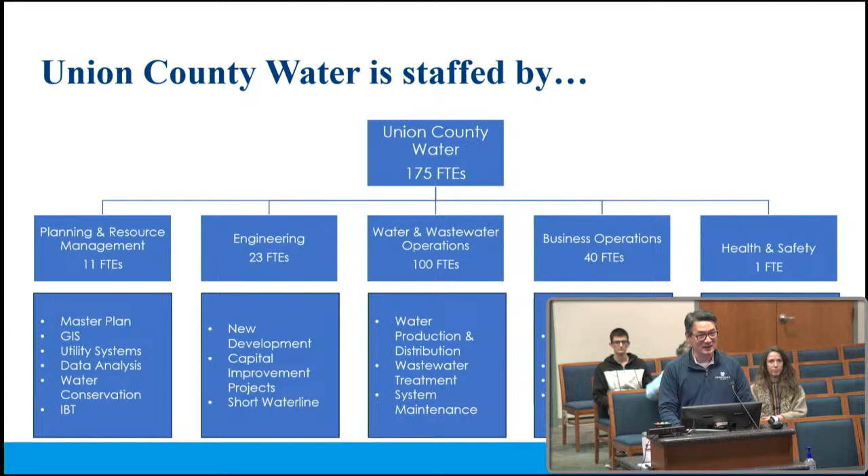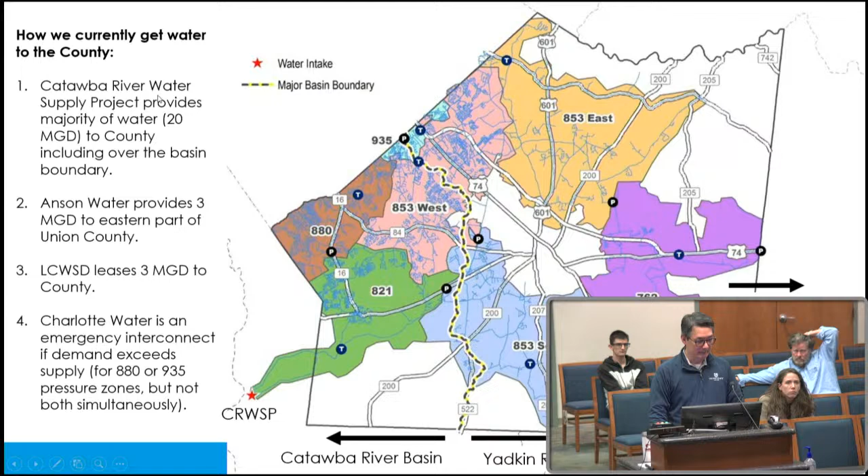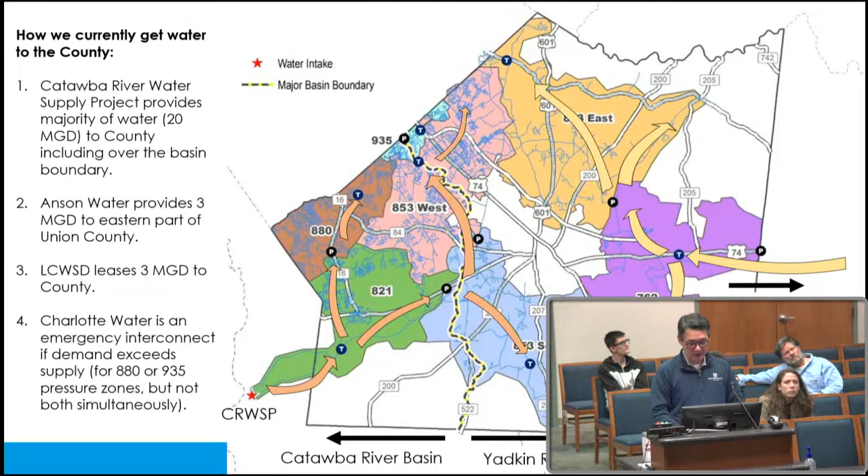You see how the water flows through this animation. Water from Anson County feeds the east part of the county, and the Catawba River Water Supply Project feeds the west part of the county.

You'll also note the ridge line still goes here. You'll see this green area is sort of a blend. We'll have to manage the water there because of the IBT and how the water and sewer system works. So water will be pushed across the ridge from the Catawba River, and it will have to be returned.

In the near future, Anson County is no longer a provider of water to us. They are what we'd view as an emergency interconnect. If we have a problem, we could ask them for help and they can send us water, and that would be about the extent of it.

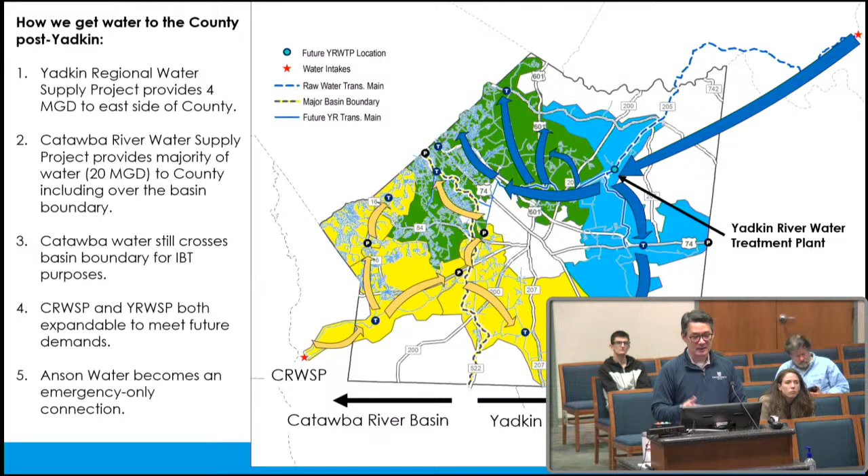Our relationship with Lancaster Water and Sewer remains the same, and our relationship with Charlotte Water stays the same. This, again - wrong way - it's similar, but easier to see the water supply project and the finished water line headed across to the west. And you've already approved a project to connect the water plant to the water mains down near Wingate.

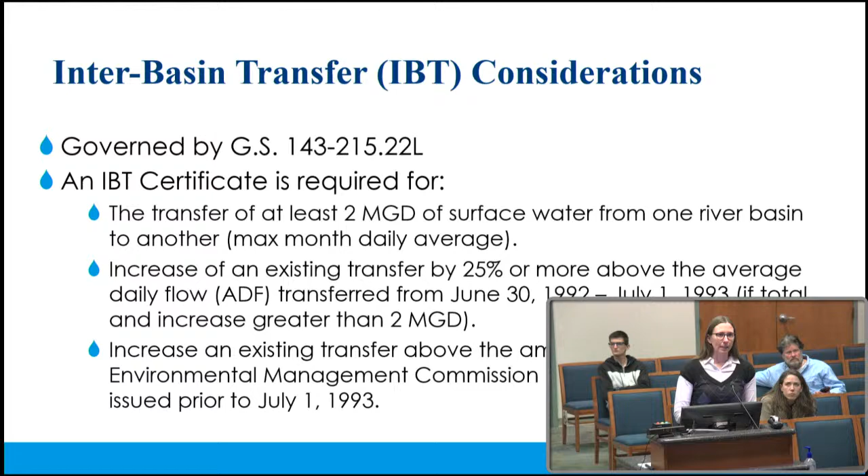So I'll give you a little bit more overview specifically how this applies with us here in Union County. If you can see the way the river basins are defined by North Carolina, essentially any of these black lines here is considered a river basin. The thicker black lines are the major river basins, but any line here, if you're crossing one of these lines, you're required to have an interbasin transfer certificate to move that water, or a grandfathered exemption.

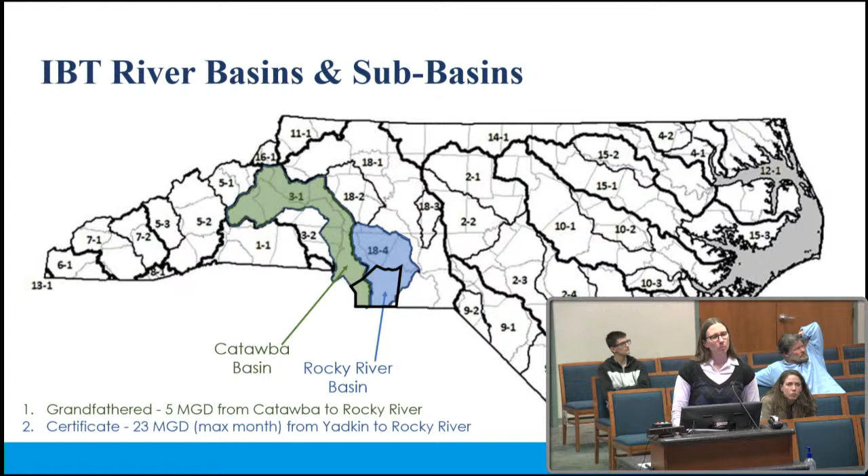For us, we are located in the Catawba Basin and predominantly in the Rocky River Basin, roughly 3/4 of Union County. But we don't have a major river going through the county itself. So that's also led to the partnerships that you just saw, right? That's why we have all of these partnerships with other utilities, because we don't have these water sources available to us. So if you're moving water from any of these basins, across those black lines, and it's more than 2 million gallons per day, it's going to require a certificate.

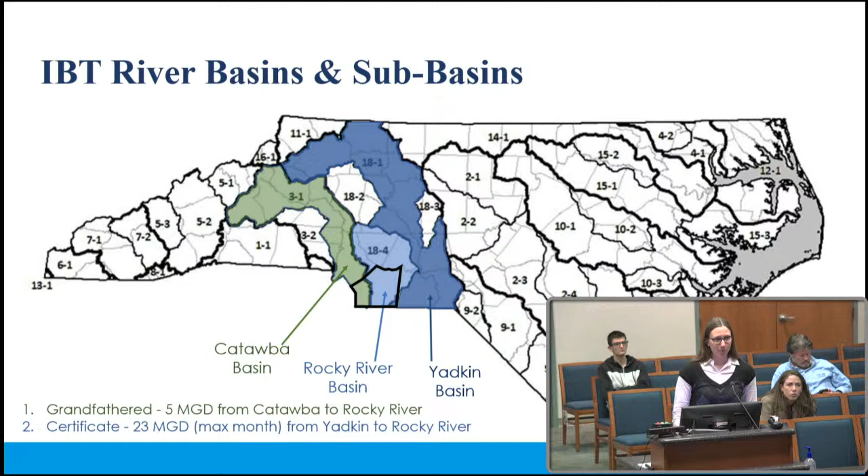So we move 5 million gallons per day. We have permission to move 5 million gallons per day from the Catawba to the Rocky River Basin, and 23 million gallons per day from the Yadkin Basin to the Rocky River.

So just to show you what that looks like for us currently. The grandfathered amount that we have from Catawba to Rocky River, we have a net of 5 million gallons per day. That means if we send more than 5 million gallons per day, we have to return some water. So we currently send anywhere between 3.5 to 5 million gallons per day across that boundary. It just depends on the weather. Certain times of year, summer, we send more for irrigation.

And then we send roughly 1 million gallons per day on average back from the Poplin Road pump station. So overall, our net IBT is between 2.5 and 4. So we're in compliance there.

Since March of this year, we have been serving the northern part of the county, the A53 East pressure zone, from Catawba rather than Anson. And that's predominantly due to the fact that they have trouble serving us. So it's just been a short-term fix while we're waiting for the Yadkin to be online. But because of that, we've been sending an extra 1 million gallons per day this year. Hopefully when Yadkin's online soon, we'll be back to our normal operations in that normal range.

And you can see we did start flowing water from the Yadkin to the Rocky River earlier this year for the plant construction activities, activation, flushing, all of that activity. So I'd expect those flows to change in the future because we're still doing that startup work.

And because we have this IBT certificate, there are stringent requirements that come with those. We have to have conservation drought management plans that are the most stringent in that basin. We cannot sell that water to others except for the town of Wingate, because they were a co-applicant with us. And the Environmental Management Commission can amend that certificate with certain qualifications. And because we started flowing that water this year, we do have to report on a quarterly basis to DEQ. So just wanted to give you that update.

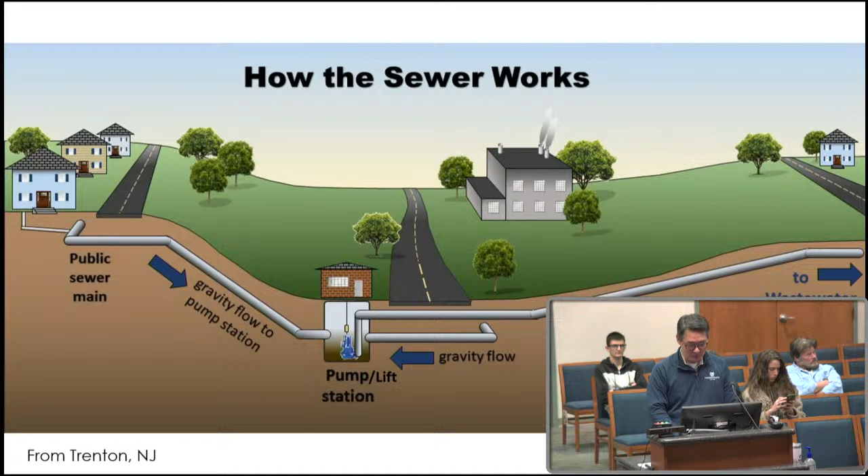And then service laterals, conveyance corridor, treatment plant - that's how, in a nutshell, the sewer system works: collection, conveyance, treatment plants, lift stations, sewer capacity.

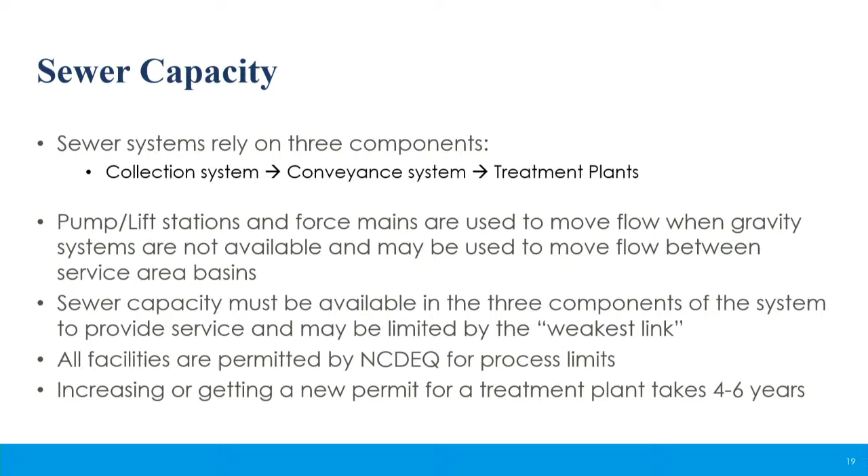When we get to a slide, I'm going to just ask John to put a pin in it, but talk about the weakest link when we get there, because it's probably easier with a map than it is on a bullet. All facilities are permitted by NCDEQ for process limits in terms of the quality of the water that we have to return to the environment.

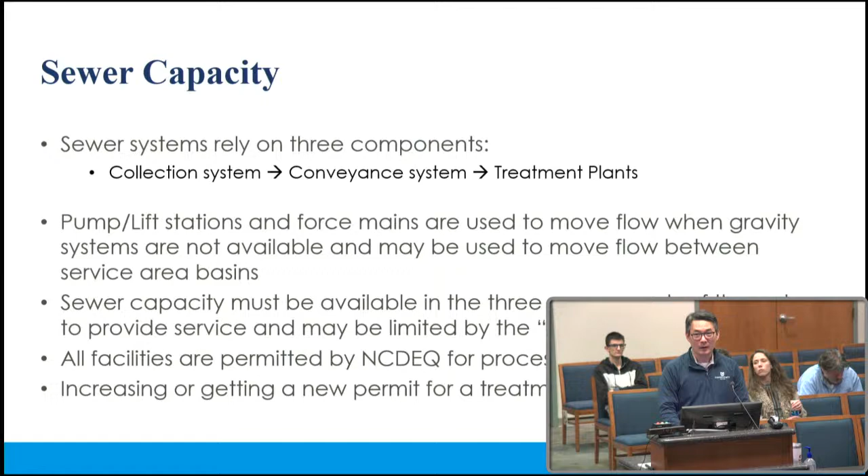We've talked about this a couple of times - getting a new permit takes a long time. This is not a quick process for us. Getting a permit for a treatment plant can take anywhere from 4 to 6 years. And I want to clarify, that's the permit, not construction time frame. So from start to finish, that's 8 to 10 years - about 4 years to get a permit, and then another 4 years or so to build the facility. I'll leave it to John to go over some of the details, because we do have some schedules to show you what that looks like.

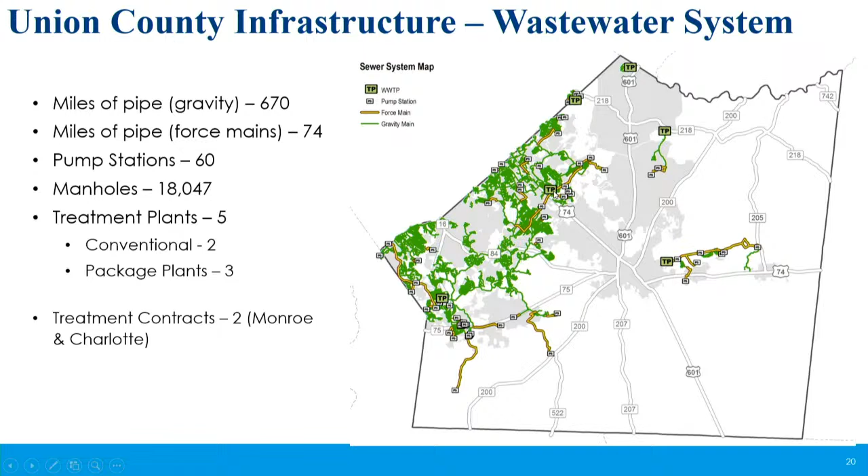We have 5 treatment plants. 12 Mile down here is our largest, right now at 7.5 MGD per day of treatment capacity. Crooked Creek up here is at 1.9 MGD a day - that's the treatment capacity of that plant. Those are our two conventional treatment plants. We also have three smaller, much smaller package plants: Olde Sycamore serves a golf course, Tallwood Estates serves a neighborhood, and then Grassy Branch, which was originally designed to serve schools.

Housing developments were permitted to connect to it, which resulted in overflow going above the capacity of the treatment plant. So, you may recall we're under a special order by consent with DEQ, and we are in the process of expanding that particular treatment plant to the right size to deal with the flow.

In addition, we have two service contracts, one with the City of Monroe for sewer. You can see this yellow force main going from east to west - so we're sending flow, essentially uphill, to the town of Monroe to treat. The flow wants to go east and north, but we're pushing it through a force main to the town of Monroe for treatment. We also, over here, have City of Charlotte's McAlpine wastewater plant, and so we send flow from the 6 Mile Basin to there.

So in a nutshell, that's our system. And again, you can see that we don't serve the entire county - we have service areas as defined. So speaking of service areas, here they are. These are the old 2016 approved service areas.

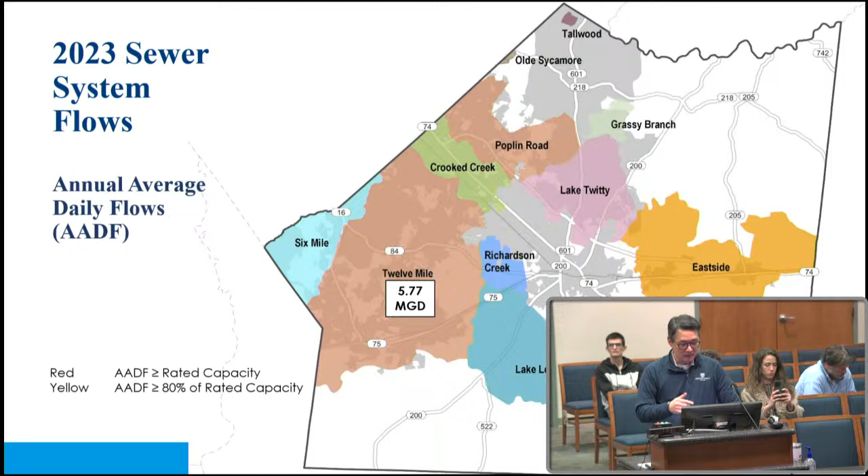In the 12 Mile basin, we generated about 5.77 MGD of flow a day. Crooked Creek, we're looking at 0.86 MGD a day - these are actual flows. The three package plants, like I said, very small amounts, about 40,000, 20,000 gallons a day. Grassy Branch is yellow because of the special order by consent - it sits at 40,000 gallons a day.

We, through the Poplin Force Main, send about 1 million gallons of flow from the Poplin Basin, which is up here, through the force main to be treated at 12 Mile. And if you recall, the basin boundary for Catawba and Yadkin goes to the edge of 12 Mile - the south part of Crooked Creek follows the 12 Mile basin boundary. So as we send water from Catawba over into the Yadkin Basin, we're returning that flow on the sewer side through the Poplin Force Main, to comply with the IBT.

Monroe treats about 1.3 MGD a day for us, and Charlotte treats about 1.8. These flow numbers are current as of this year. We're sending a little bit more to Charlotte right now than we have in the past.

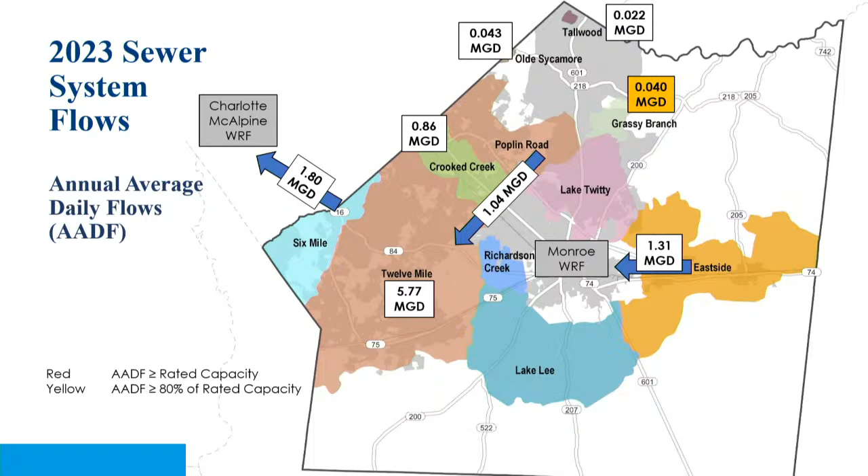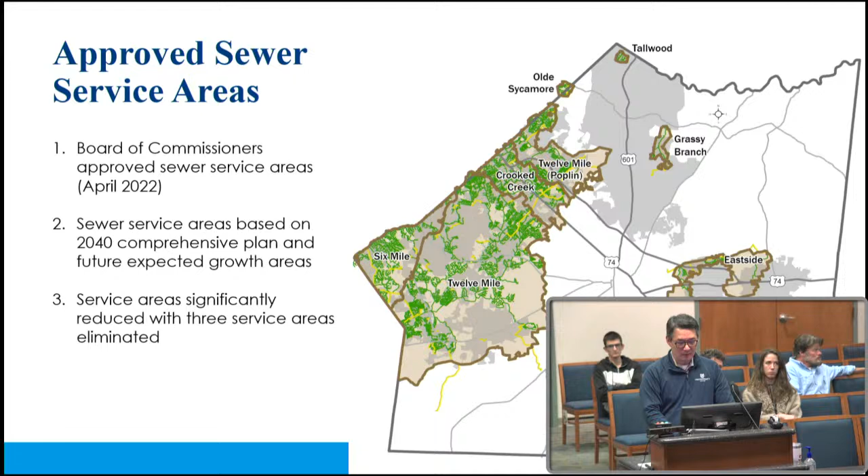If you recall, in April 2022, the board approved changes to the sewer service areas. So what you're seeing now are the downsized service areas. Based on the comprehensive plan and the master plan the board adopted, we should shrink our service areas to match, and you can see what they are here. I've overlaid it with the old one, so you can see the areas in blue are no longer in our service area. We're really focused on the west side, dealing with this little pocket on the east side, and then the package plants. But given the development plans for the Lake Twitty and Lake Lee area, we have no plans to provide sewer service in those areas.

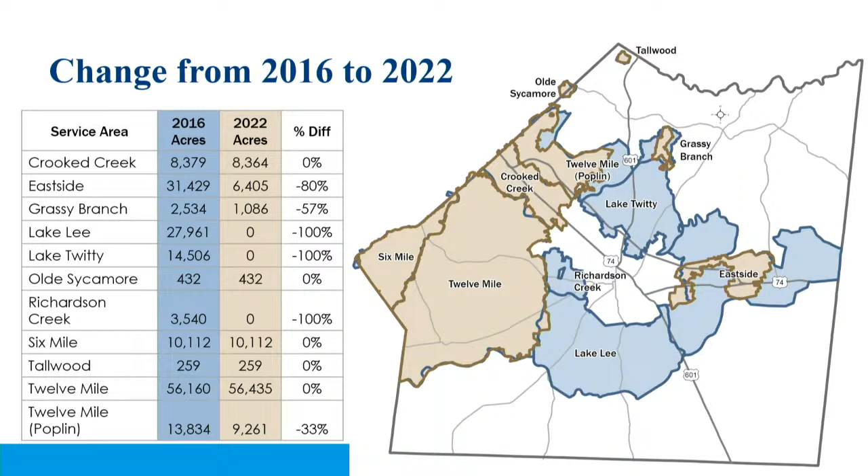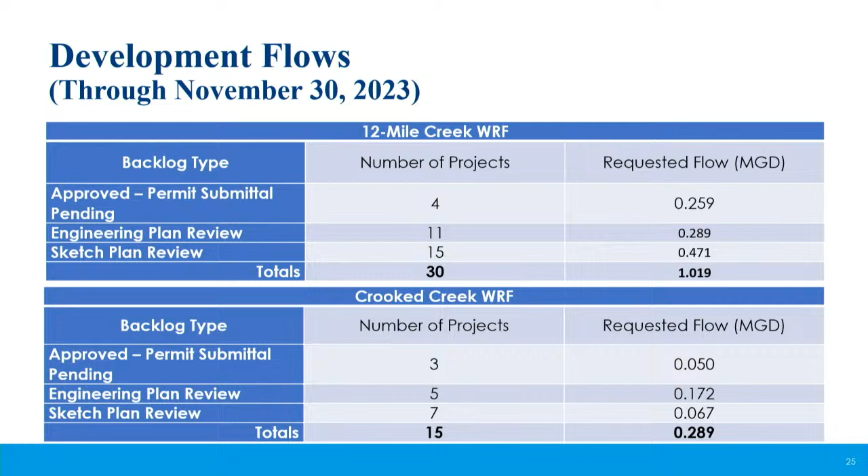We also keep a running list of development projects for both 12 Mile and Crooked Creek, and you can see those numbers here as well.

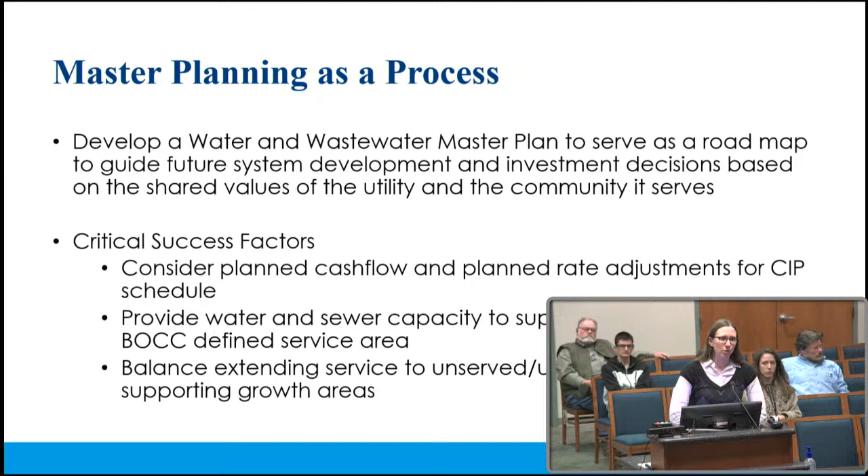Again, we're reaching the end of this project, so this has been a slide that hopefully you've seen several times at this point. The beginning of the project is data collection, and we start modeling. Then we evaluate the gaps between those levels of service, the performance targets we want to hit, and where we are projecting us to be, coming up with alternatives, and then generating the list of recommended projects. All of that work has been completed, and you'll see a recap of that work in summary. Then we're looking for direction to wrap up the master plan document itself with direction from the board on what projects to include.

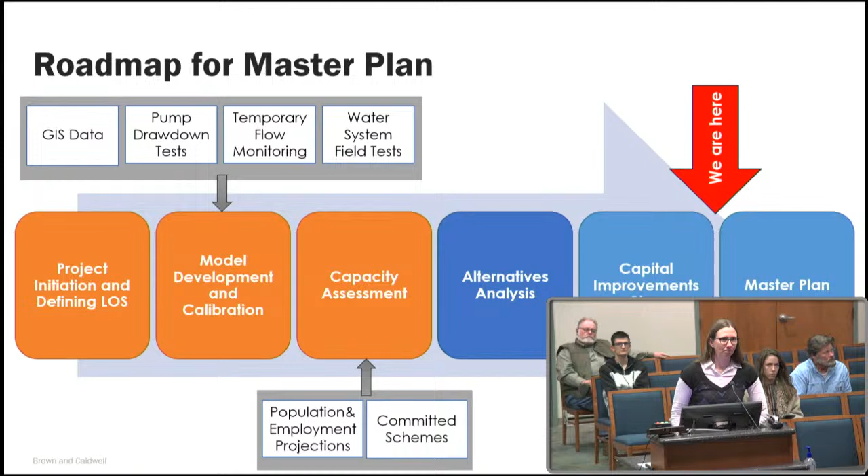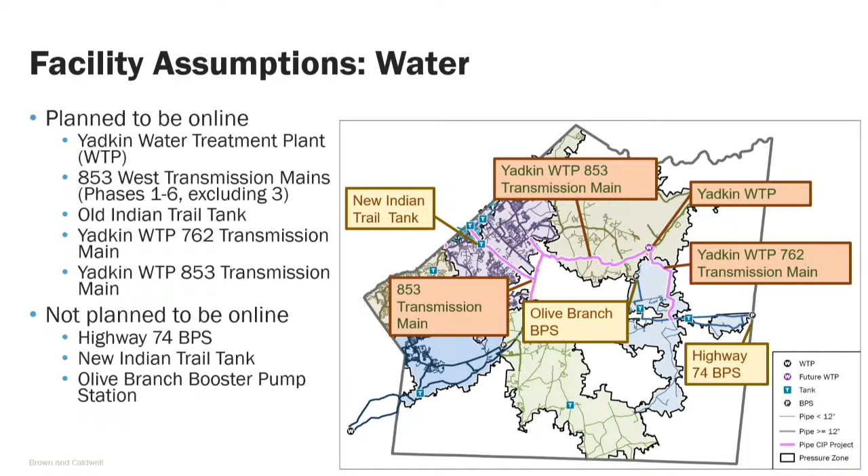When we're looking at the system projections, we need to have a starting point. We didn't want to start from where we actually are, but with all the projects that are in construction being completed, so that we're seeing a realistic picture of when we go do capital projects, doing them with the system we're anticipating to have in the very near future. For example, we are planning to have the Yadkin project online when we're doing this modeling, so that we're seeing near future results.

Things that we are not going to have online are related to projects that are wrapping up. For example, the Highway 74 booster pump station and the Olive Branch booster pump station are both tied to service from Anson County, so we can boost that water up to serve customers. When we're serving from the Yadkin project, it'll reverse that flow, and we won't need to boost that water, so those facilities will go offline.

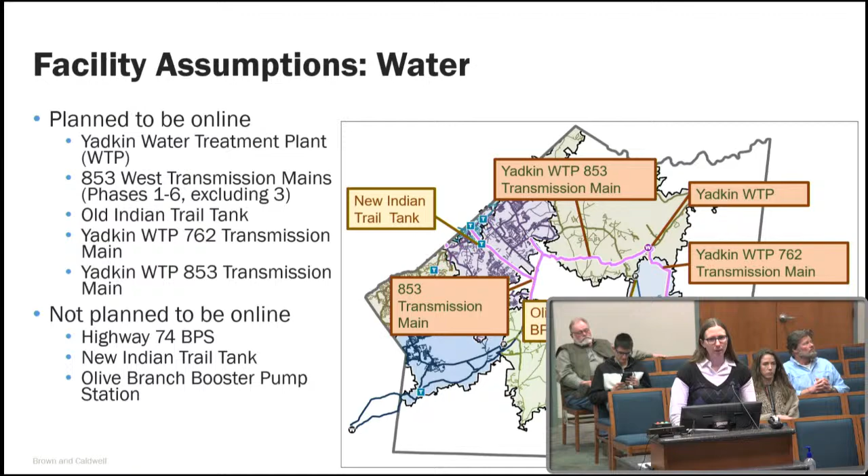Also not in service here is an Indian Trail elevated storage tank. That was previously planned as a project, but it's been delayed due to a tie-in with DOT. So if something wasn't in construction already, we wanted the master plan to regenerate that as a project, to resize it and redetermine the need for that project.

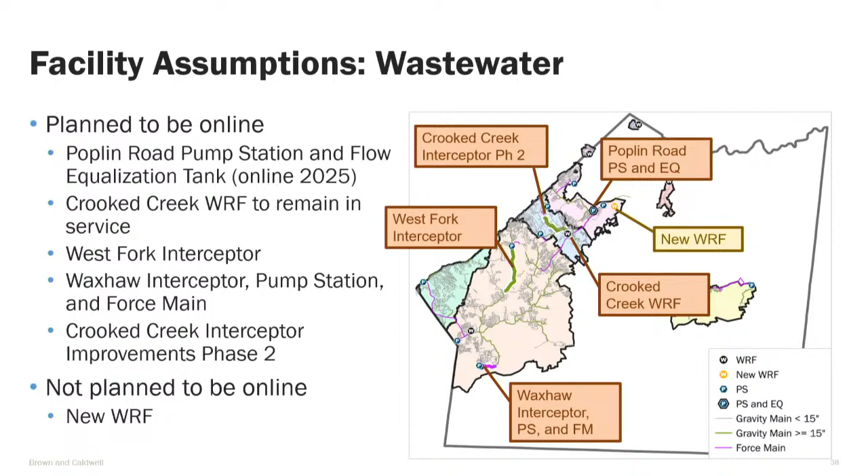Similar on the wastewater side, we wanted to make sure that all projects in construction were incorporated in the model. All these projects are either completed or nearing completion right now. Not incorporated, because it has not begun design or construction, is a new wastewater plant. So we're letting the modeling and our consultant, Brown and Caldwell, determine the need for any future facilities, and letting the master plan determine that.

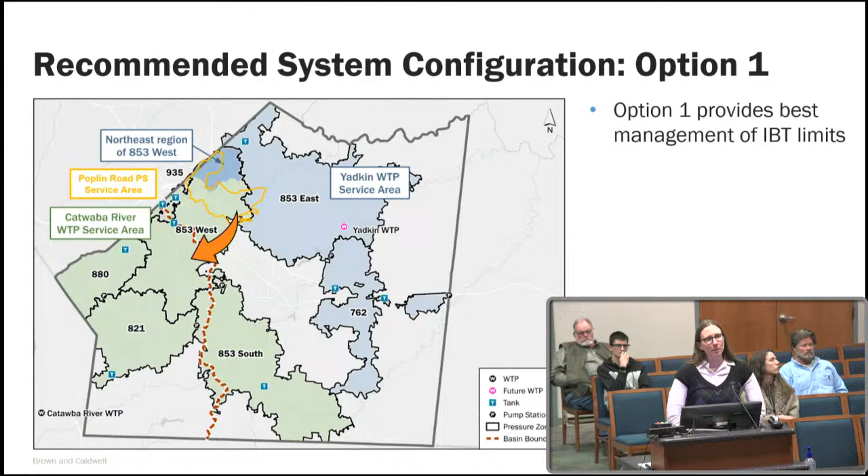One thing we needed to do because of the Yadkin coming online, thinking back to the interbasin transfer and the requirements that go along with that, is determining where the new service area boundaries are for each of the water plants. We want to make sure we're complying with both interbasin transfers. We can't send water from the Rocky River to Catawba, for example, so we want to make sure that during different times of year, we're not transferring too much in one direction. It's actually quite a lengthy analysis to determine something that works for the system, closing boundaries in the right place, where our customers still have adequate pressure and access to water, while operating within these requirements. The area shown in darker blue is expected to switch from being currently served by the Catawba to being served by the Yadkin in the future.

With fire flow, we want to make sure that we can help with that public safety need, especially depending on the type of land use. Obviously, an industrial facility has a different need than single-family homes. When we're looking at storage, we're looking at providing safety for a fire flow emergency or another kind of system emergency.

But we also need to make sure that we have water throughout the day. Our customers use not very much water at night and a lot at dinner time. So making sure that we balance that water need throughout the day, that's partly what storage does for us.

And finally, looking at our pump stations, we want to make sure we can meet all these needs with the largest pump out of service. So if something's down for maintenance or any kind of pump failure, we can still meet the needs of customers.

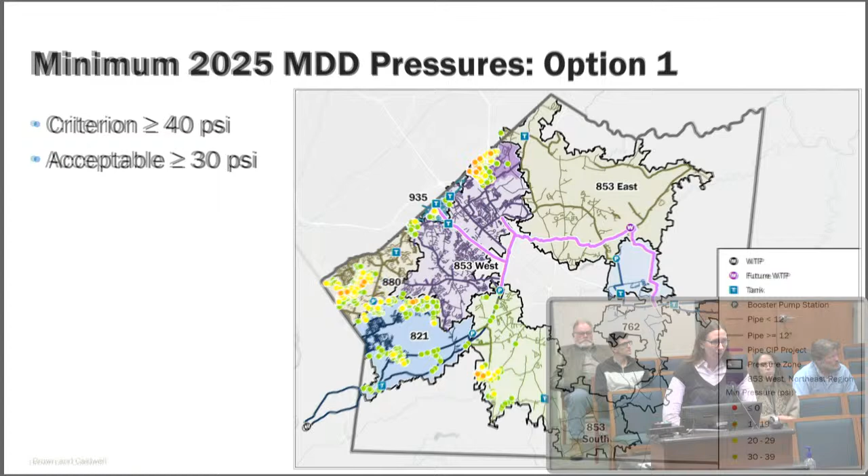So I'm going to show you several charts now, several maps, and I'll go a little bit quickly once I get past this first one. I'm going to show you in 5-year snapshots the results from the model, starting with pressure. This is showing option 1, considering that configuration change for the Yadkin plant.

If you do not see a dot on a water line, it means it's fine. If you're seeing a dot and it's green, it means it's meeting that acceptable level, but it's not really where we want it to be - it's not at the goal level. Anything yellow, orange, or red is not meeting our expectations.

So at the beginning point, you can already see we're having an issue. This is considering a maximum day - a simulated day. Think of it as the worst day of the year, that summer day where everyone goes out and irrigates at the same time. So you can see already some issues, particularly up in that northern area.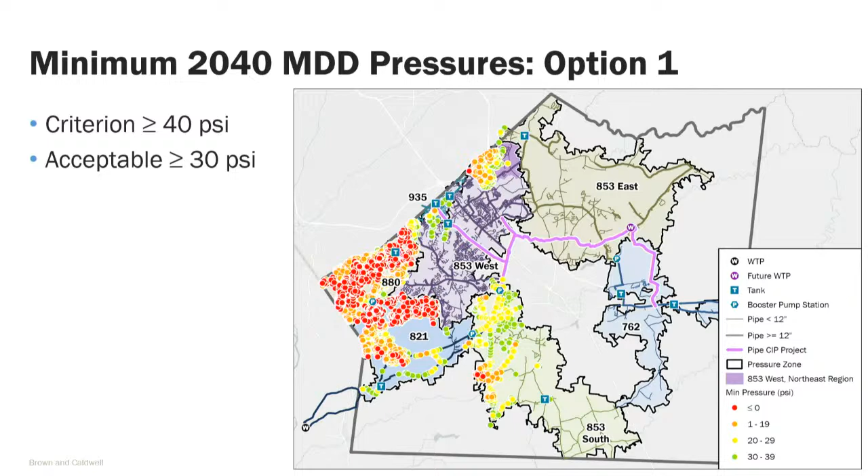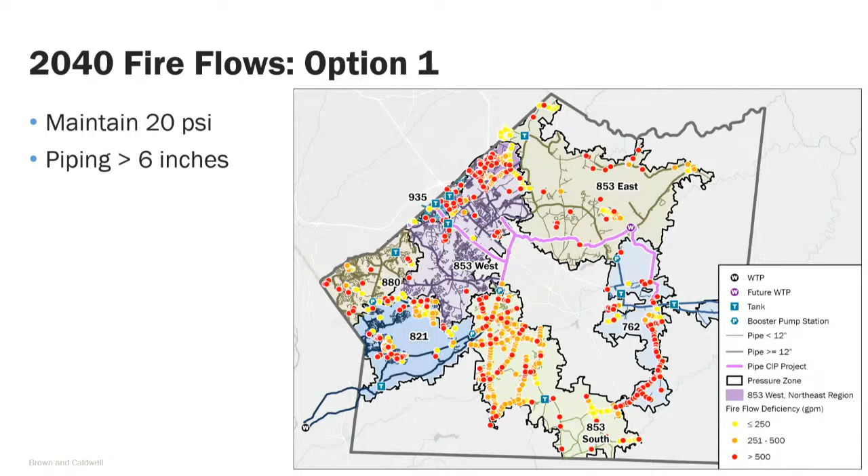So I'm going to advance again every 5 years, and you'll see more orange and more red, particularly in the south, the 853 South zone - there's a lot more dots, a lot more orange and red. We previously had identified, from actually the 2011 and 2016 master plans, to have an additional transmission main and storage tank project down there. They haven't been built yet, and so again we can see that continued need to upsize transmission capability down there.

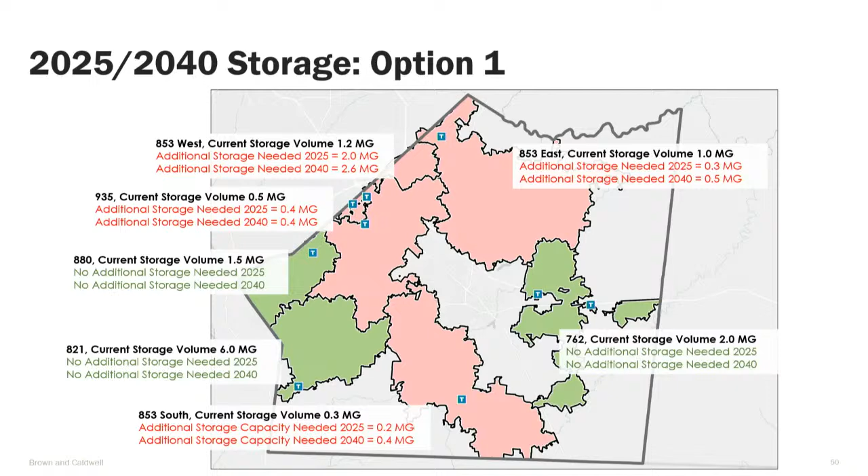Again, my name is Chris Clark. I like to say I'm the new Andy. I've been here, as I mentioned, a very short time. Very pleased to meet all of you, be in front of you tonight.

One of the things we'll talk about is the Yadkin Water Plant. In 2021, based on the design builder recommendation for the size of the plant, we thought we could start off with a 16-hour-a-day operation. But as we've operated the system and gotten used to how the plant works, we believe it's necessary to move to 24-hour-a-day operation.

We're producing the same amount of water, same volume, but over a longer period of time, which keeps everything engaged. We won't have to shut the plant down, keeping an efficient operation. To do that, we'd like to request 4 additional full-time operators to run the shifts efficiently with sufficient manpower at the plant. This will increase not only shift and schedule flexibility, but also safety—no one works alone, making sure we stay safe at the plant.

The other factor is regulatory. NCDEQ requires us to have a licensed operator if we're pumping and making water.

We're not going to need additional appropriated funds for this position—we'll be able to fund it within the existing budget, with minimal non-staff related costs since we're not producing more water. Same chemical usage, same basic electrical usage. So the only impact is really the staff cost for the additional 4 operators, but that is our recommendation right now. Thank you.

Okay, next we're going to move on to the wastewater collection system. This is a combination of gravity mains, lift stations, and force mains—how do you get the flow from someone's home all the way to the treatment facility?

For gravity sewers, we want to keep the flow in the pipe—we allow it to go up to half the manhole depth, but ideally we keep it in the pipe. With pump stations, it's very similar to the water side: we want to be able to operate and meet demands with 1 pump out of service.

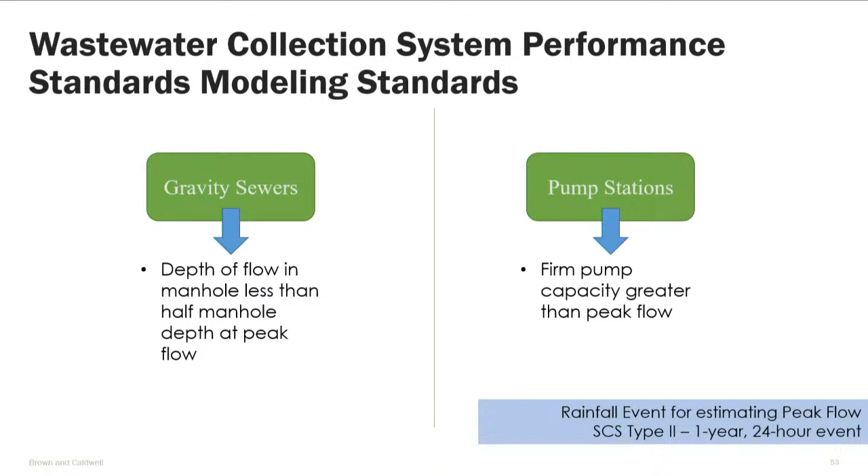We always have to choose a rainfall event to simulate for these, because rainfall is very important on the wastewater side—it will find its way into the system as much as we try to keep it out. So this is essentially a storm we're expecting to happen, statistically, once a year.

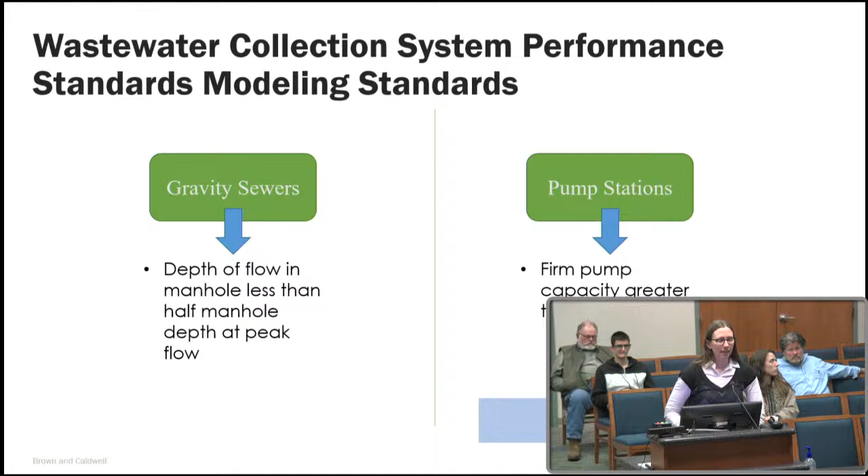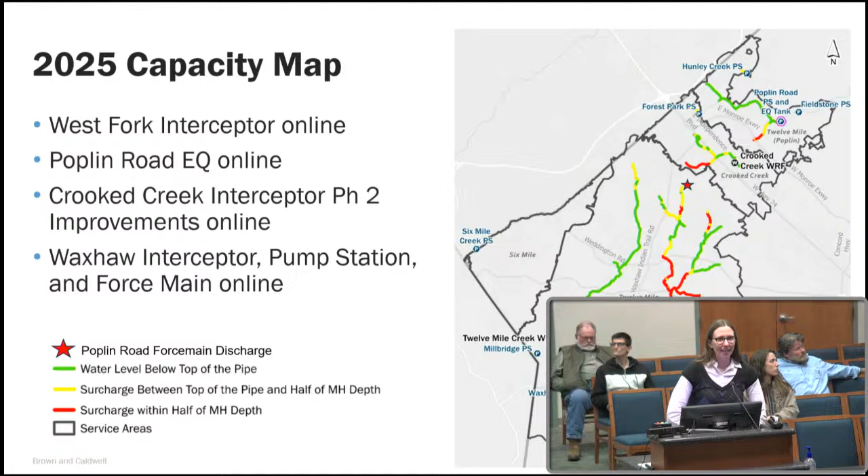If you're looking at the current snapshot of all the infrastructure online, knowing that red is bad, you can see a lot of red to begin with. These maps won't change substantially as I go out in time. The area we predominantly see in red—around the East Fork interceptors—is already nearing capacity. We're already seeing issues. This was identified in the previous master plan as a project, but we've seen it advancing in terms of flows over time. It's materializing much quicker than we expected.

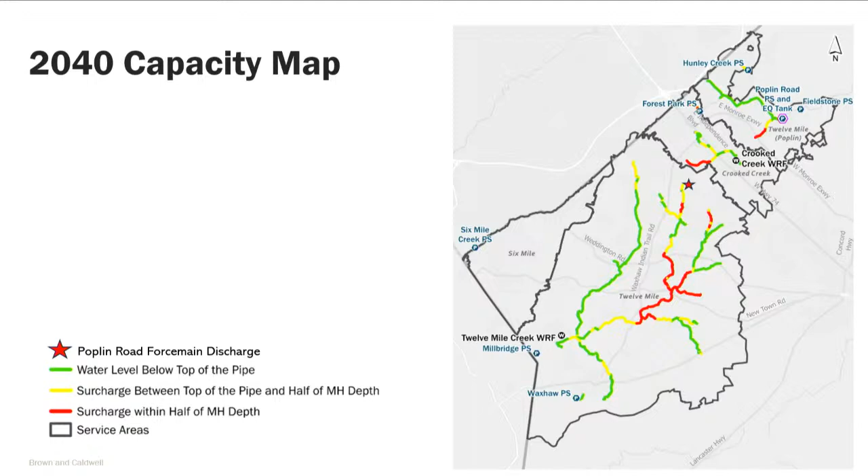So I'm going to show you moving out in time what this looks like, and again you won't see much of a difference. Here's 2030, here's 2035, and 2040. Once the water is leaving the pipe, it really doesn't get much worse than that. So what this is showing is that these areas are already nearing capacity.

Sure, if I can just point something out—I said it earlier, but I thought it was John's slides, but it was Aubrey's slides.

It takes pumps, conveyance, and treatment in order for a wastewater system to work. This is a good graphical representation. Even if 12 Mile was a 50 MGD treatment plant, it wouldn't matter at this point, because this red is so congested we couldn't get flow to that plant even if we could treat all of it, because it's just backing up. So for a wastewater system to work, you must have not only treatment capacity but also the conveyance corridor properly sized to get the flow to the plant to be treated.

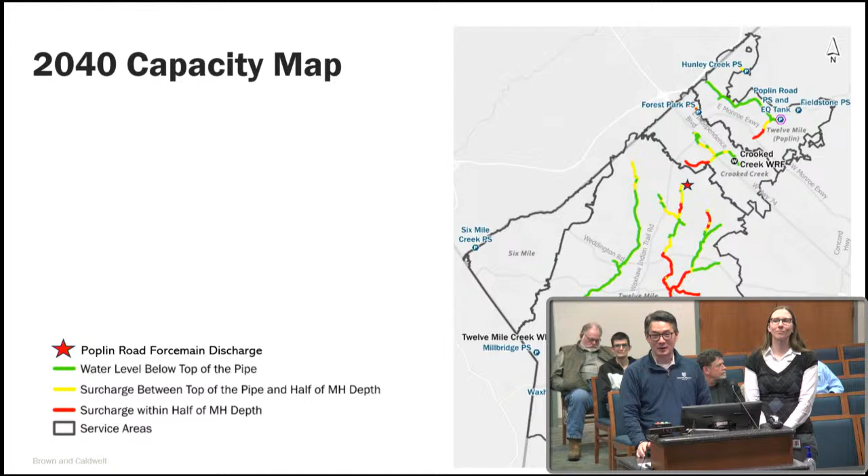What this is showing you is that the conveyance corridors aren't sized properly to handle what we project the flow to be. So what you're going to see—and this is something Brian said that I hadn't thought of until he said it—is that even if we can permit, say, a new 500-home development at the plant because the capacity exists, if the conveyance corridor can't handle the flow from that development, we're not going to be able to permit it. That's just how the reality is. I don't know if Brian wants to add more at this point, but I'm going to go sit down now.

Yeah, so that's a good segue there, Hung. To his point, the master planning process is really important because it looks out for multiple years. We had completed a master planning process in 2016, and the utility was going in the direction of that master plan. There were a number of projects and things identified in that plan that were anticipated to address a lot of these issues.

And if I'm not mistaken, East Fork was part of that. It was identified at that time that there was going to be issues with that corridor. They came quicker than anticipated, but it did anticipate that there would be some constraints in the East Fork, and there were plans in that master plan that would address that.

When a board decides to go a different direction, which is certainly fine, the ship doesn't turn quickly. So it takes a long time for us to get it in the direction the board wants to go, and it subsequently creates new challenges and new things we have to do differently that we didn't anticipate, because we weren't looking at going in that direction. So I don't want anyone to think that's red because we didn't know it was coming—we knew it was coming. It came a little quicker than we thought, and some of our future plans have changed, so that just creates a situation where we've got to make a decision on what we do for the future.

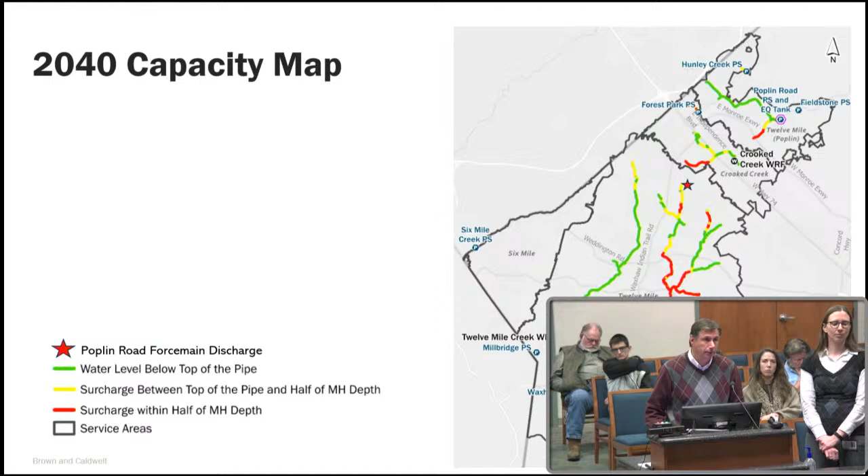They are not currently in the CIP. The consultant is recommending some projects for you to consider, and we have that in later slides, but you're right, there are projects that would have to be added to the CIP if you choose to add them, and therefore that would change your rate structure. Okay.

So this is the last of the performance criteria work from Brown and Caldwell in the master plan. And so that is what they use to then generate the alternatives and the projects. And so that's what we're going to move into next. Aubrey, I'm sorry, I want to stop you here one second. Sure.

So in regards to the area identified in red, this problem was existent long before Site B, correct? So this is something that we identified long before we ventured down that project path, correct? Yes, sir. We identified that it would be an issue, and we came up with a strategy at that time. Okay, and is it correct to assume that there could be multiple strategies to mitigate this issue?

I think as far as the strategies to mitigate it, I would say multiple. One is you essentially don't approve any more permitting in the area, that way you don't create flow. That's certainly a strategy. Another strategy is that you divert the flow that is coming through there. That was a previous strategy. You take that Poplin flow and you send it to another wastewater treatment plant. That's a strategy, but it still requires an upsize of that pipe if you want to continue to flow additional flow through there.

Fair enough, does that answer your question? Yeah, okay. I think that we can look at it several different ways. So one option would be no permitting there, and that would be up to the board, obviously, but

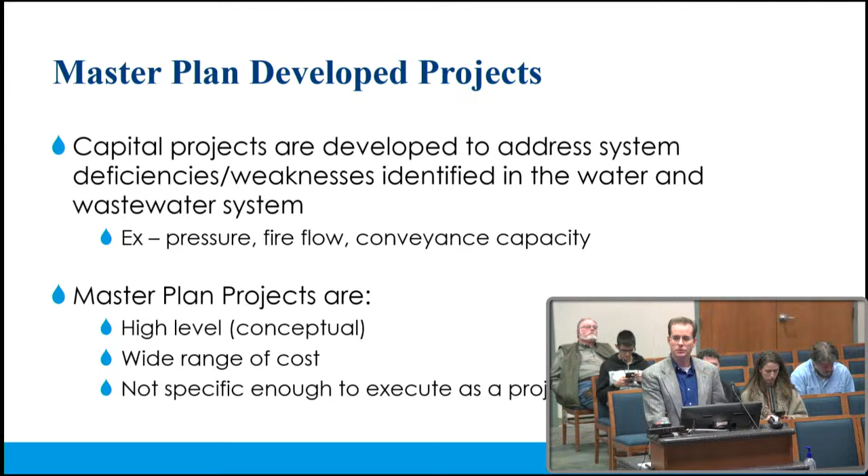But they are high level in nature, not a lot of detail. The cost estimates therefore have a wide range to them. And of course, you wouldn't take a project identified in a master plan and just try to go build that. The maps we show you are really the level of detail we have on these projects at the master plan level. So there's a lot of work to bring it to a point where you could actually hand it off to a contractor and construct something.

One thing to point out here is we do update these budgets every year. So the master plan is done, and then as we get better information, we take those updated cost estimates and put them into our rate model. So we're back checking ourselves as we go through time, just to make sure that the plan and the financial model that we built is still sufficient.

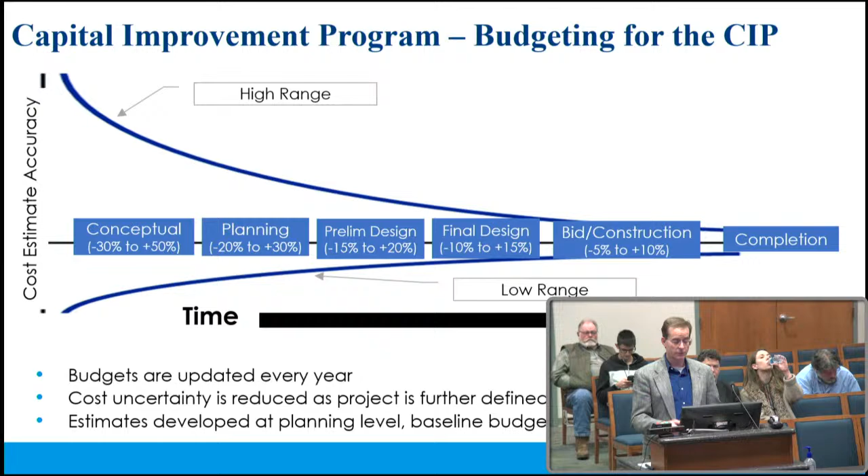Now, this was the first pass that Brown and Caldwell took at the master plan projects. So staff necessarily review these, and we have some input to them. We took this and said, okay, some of these projects need to go together, some things weren't considered, maybe we could do some things a little bit differently. So what we did here is we took that original CIP, took a good hard look at it, right-sized projects, made some corrections to some of the assumptions, aligned everything based on better information, and at the end of the day, it results in going from $650 million, unfortunately, up to $750 million.

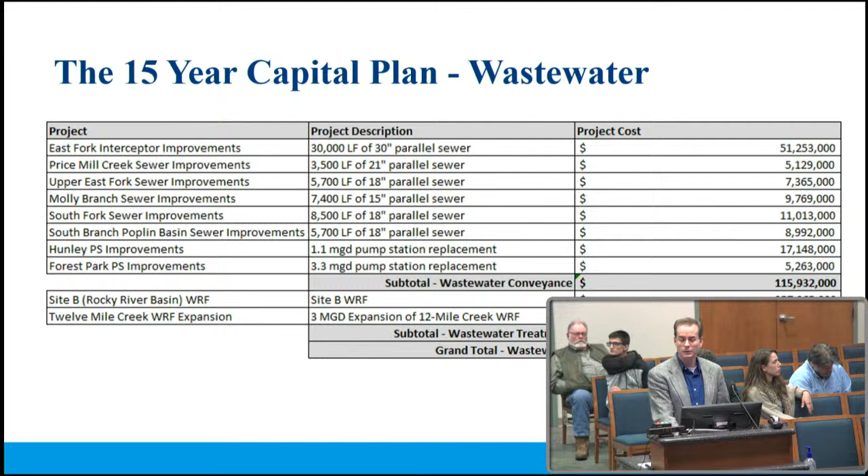It's also important to understand that the capital plan doesn't capture everything. We do our best, it looks at the big picture for the utility, but certain things I want to draw your attention to that it doesn't include are an expansion of the operations center, personnel space, and continued operation of the Crooked Creek wastewater treatment plant.

We looked at the Crooked Creek plant several years ago and identified a number of projects that needed to be executed to keep that plant running, but we did it with the perspective that the plant would be coming offline, because at the time the current plan was that we would have a new wastewater facility and that existing facility would be taken offline. So there's going to be some investment necessary there on the capital side to keep that plant running for the interim future.

It also doesn't address anything related to issues that have arisen recently with the Poplin Force Main discharge location and odor control. And it also does not consider future funding for the short water line extension program.

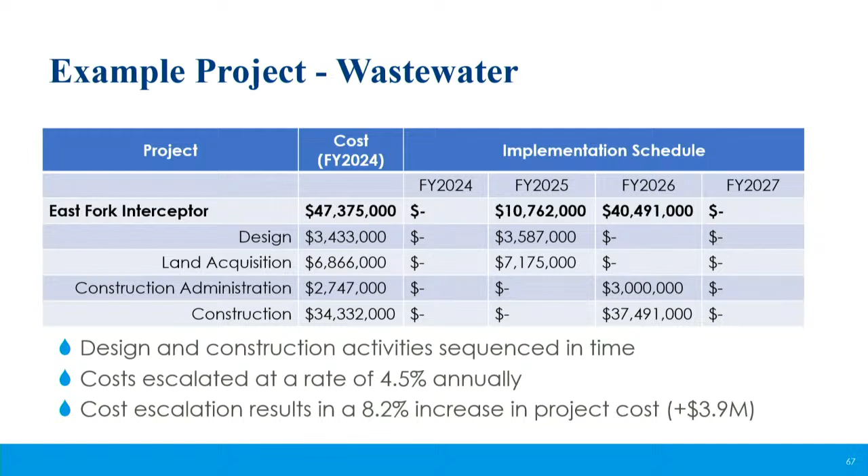When you look at when we're actually going to execute it, so we'd be starting design next year if it were to be approved, and then we would move into construction in FY26. But applying escalation factors to those individual line items, you can see that over time it does add dollars to the project, almost $4 million in this case, roughly an 8.2% increase.

So this is typical across all the projects that you saw on the list. And that's because it's just not physically possible to build everything day one. You can't do it.

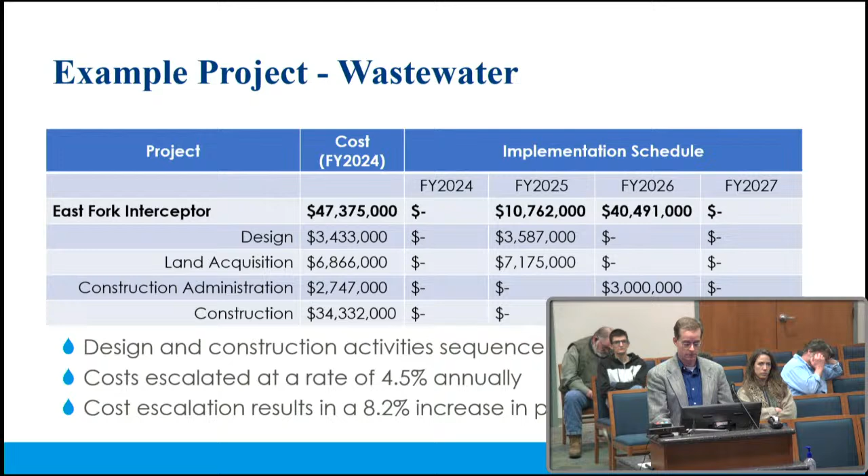So Hung said I'd be talking about the projects listed in the spreadsheet. I have good news for you, I am not talking about all of the projects. But I do want to talk on the treatment capacity projects, because those do comprise the majority of the capital plan expenditures.

And John, before you do that, again, this is just about showing the board the order of magnitude. This doesn't assume that you will or will not approve all these projects. It's just about seeing it, understanding it. We'll ultimately need direction from you on what we do or don't do, because that's what we build into the finance model to figure out what we do. It's just so you understand the full scope of the entire list.

So starting off on the water side, we have talked about the fact that an expansion at the Catawba plant is predicted to be needed. Brown and Caldwell estimated that our demand was going to be 34 million gallons a day by 2040. For reference, our current share of that plant is 20 million gallons a day, which means we would need to increase that capacity by 14 million gallons.

I'd like to point out that this is one of those projects that staff had a lot of input on when we were going back and looking at the listing of projects. And the reason I say that is because a 14 million gallon a day capacity increment at Catawba just isn't practical. The plant is predicated on an 8 million gallon a day increment, so we would replicate that.

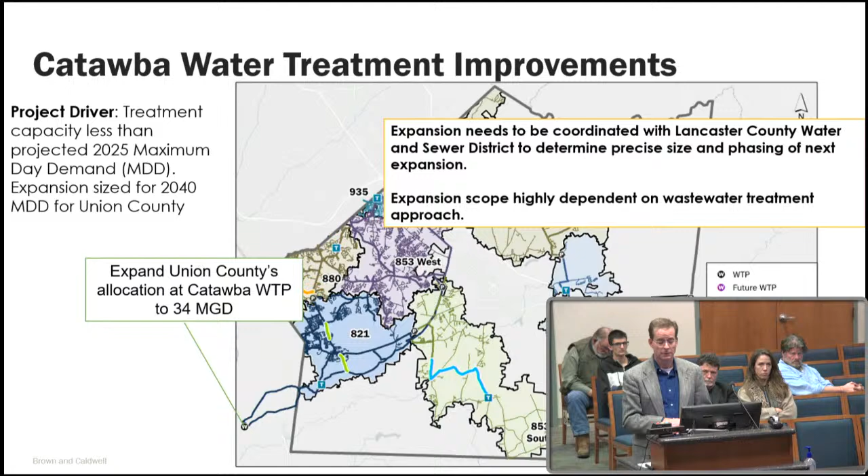Brown and Caldwell developed cost estimates for all of these projects. In this case, these cost estimates are high level, using unit costs. They don't know much more than the fact that you need X gallons a day of treatment. The unit cost for that is $6 per gallon, resulting in $84 million in base construction cost. There's a lot of variability in that, so there's some factors built on top to account for contingencies, and then professional services added on for design and construction administration. This yields your net project cost, which in this case was $168.5 million.

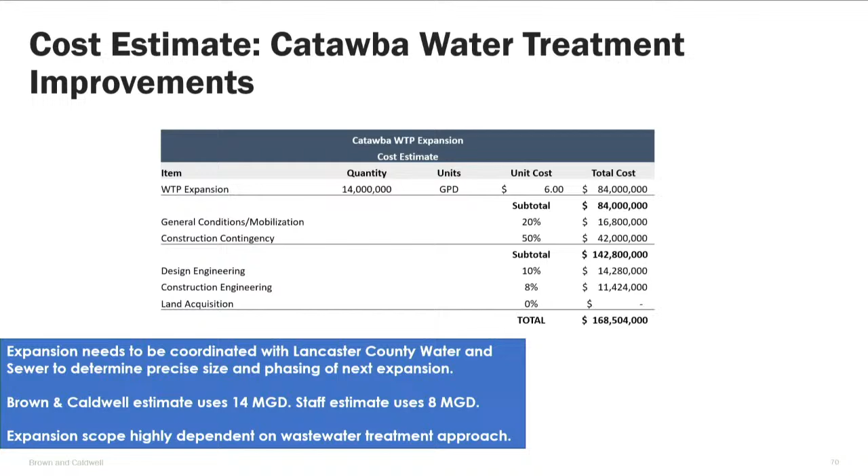For reference, after staff looked at this and reworked that project, the cost to Union County would be $96 million for this particular project.

It's important to note, as Aubrey and Hung talked about, that our water and wastewater systems are tied together because of the IBT. You simply can't separate them. So depending on what the board decides to do as an entity on the wastewater side, it's going to impact what we do on the water side. If we choose to build a wastewater plant, that could alleviate demand on the Catawba plant. If we choose not to build a new wastewater plant on the northeast side of the county, that could increase demand on the Catawba plant. So depending on where we make capacity available, that's where growth is going to be driven, stressing or alleviating stress on existing facilities.

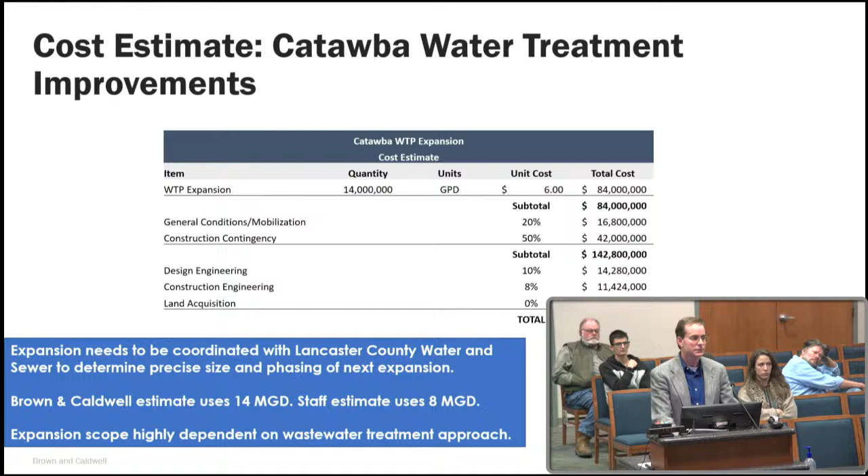John? Yes, sir. You said January 15th, roughly, we can produce water out of the Yadkin? Yes, that is the date we're anticipating staff will take over the plant and begin distributing water to the system. And we're using a lot of water from the Catawba to supply people in the Yadkin. That's the IBT. Yes, sir.

But we can't use the Yadkin because of where we're going to get rid of the wastewater, right? Well, it comes down to a balance issue. Utilization of the Yadkin, if we have the ability to treat wastewater in the Yadkin Basin, then we can utilize the Yadkin water treatment plant to a greater degree. If we're treating wastewater only in the Catawba Basin, then by necessity we're driving down the utilization of the Yadkin plant, because we can't have a situation where we have water going from the Yadkin Basin over into the Catawba Basin as a net return.

Is there a comparison between the costs we pay in our part of the Catawba compared to what it's going to cost in the Yadkin to produce water? Like 6 Mile is considerably higher, going to Charlotte. Certainly, I understand, but I can't answer that question because the plant's not in operation. We don't have any data. You're not too sure what it's going to drive cost off of? Of the per gallon cost. I understand what you're driving at, but I don't have the information.

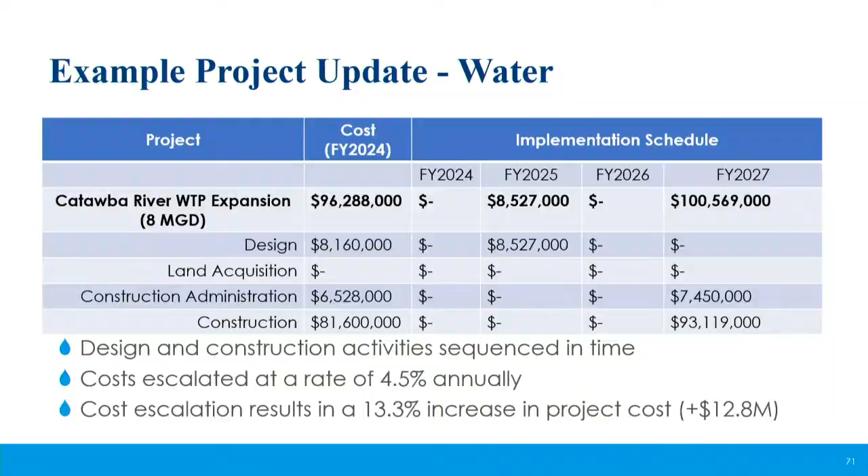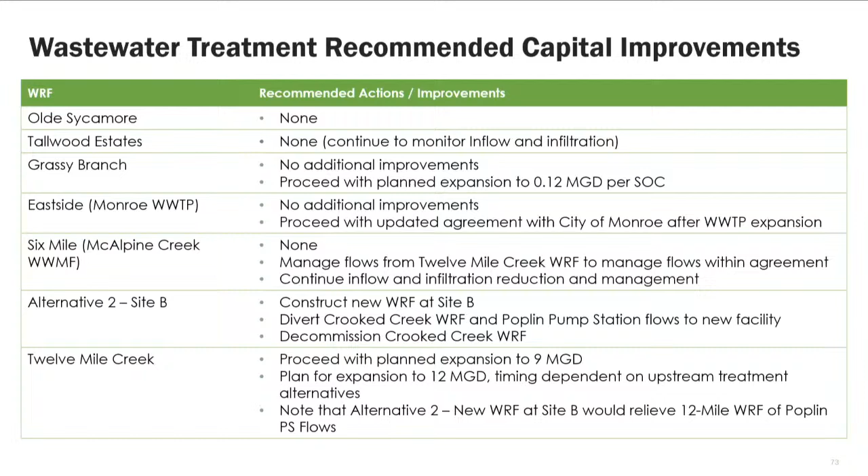So I want to touch on the wastewater treatment improvements recommended out of the capital plan. Recommended capital improvements are 3 package plants. No improvements are recommended for any of those plants beyond what we're doing with Grassy Branch and the special order of consent, which we've already talked about. Our agreement with Monroe on the east side has no additional improvements scheduled there - we're simply managing our treatment contract with the city of Monroe. Same with 6 Mile - no improvements, just managing that contract with the city of Charlotte.

We do have the Site B wastewater plant recommended out of the master plan, and moving further out in time, an expansion to the 12 Mile plant, moving it from 9 MGD up to the 12 MGD increment. Again, it's important to understand that should Site B move forward, there's likely going to be less pressure on the 12 Mile plant, as we've already discussed, because Poplin would be conveying its flows to a new plant, relieving about 1 million gallons of capacity off of that plant. So the timing of that expansion for the 12 Mile facility is really highly variable.

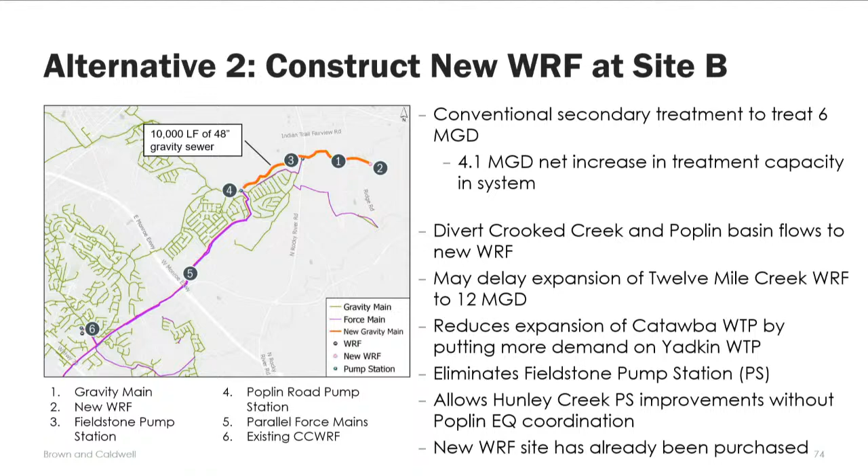So just walking through the new water reclamation facility at Site B - it's estimated to be a 6 million gallon a day plant. This results in just over 4 million gallons of treatment capacity increase in the system. It would divert Crooked Creek and Poplin basin flows to that new facility. It could have the impact of delaying expansions out at the 12-mile plant, and would likely reduce the demands on the Catawba plant while increasing utilization of the Yadkin facility. We would also be able to take the Fieldstone pump station offline, allowing us to execute another capital project without concerns about system capacity at the Poplin facility. Additionally, we already have property for Site B, so that's something we would not have to contend with in the project process.

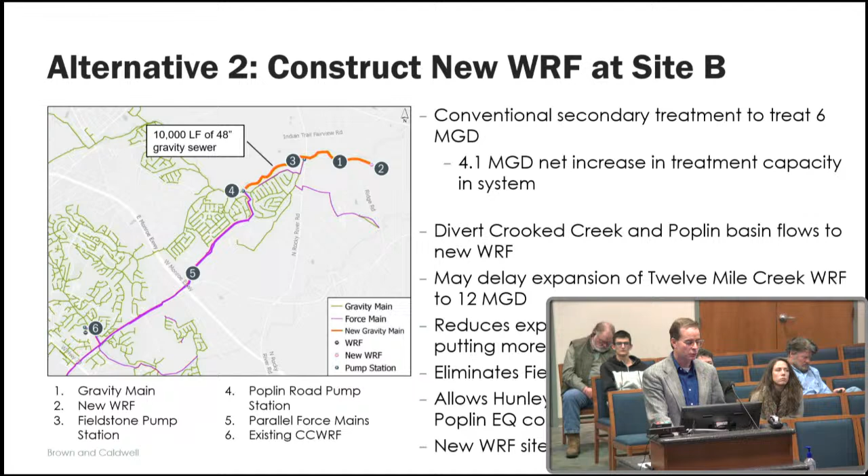Going through the cost estimate, same buildup - there's a treatment increment, a unit cost, and a number of other items as far as the remaining modifications that would need to be made. When you factor in the uncertainties in construction and scope and the professional services, you come out with a cost that's about $229 million. Again, this was a project that staff looked at very hard, and unfortunately the net result on this one was an increase.

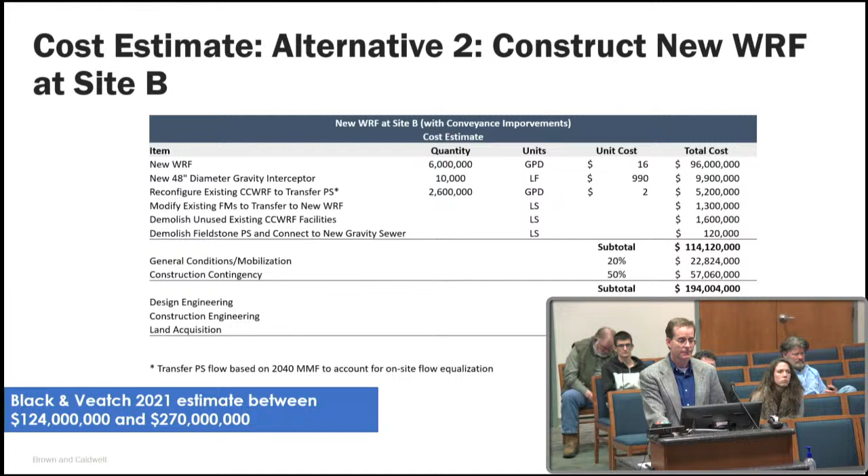One of the big drivers for that was, at the time this estimate was developed, shortly thereafter there were a number of projects bid, and that unit cost went from $16 a gallon up to $20 - about a 25% increase in the unit cost. Propagating that through, if you were to go back and look at the staff comparison slide, you'd see the net project cost for this project netted out at about $303 million. So it was about a $75 million increase, and that's just due to market conditions.

So looking at how this project was looked at in the master plan, there's some benefits to this. You gain capacity in the system, which allows you to better utilize and manage that IBT. A number of things I've talked about here already.

One of the drawbacks of the new wastewater facility is there's a lot in it. It's not only the facility, but the conveyance to get wastewater to the facility, the decommissioning of the Crooked Creek facility, modifications to Poplin, and decommissioning of the Fieldstone pump station. All of these things have to happen, and they have to happen in a certain sequence.

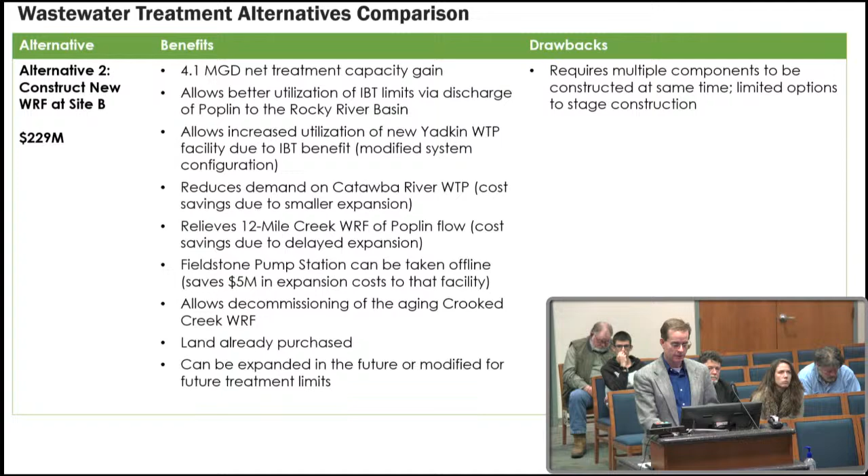You're not going to be able to control when those things happen. It's like a series of dominoes—one has to happen after the other. You can't move stuff around and do it in a different order. So that's going to tie our hands a little bit, and that's what that drawback is trying to convey.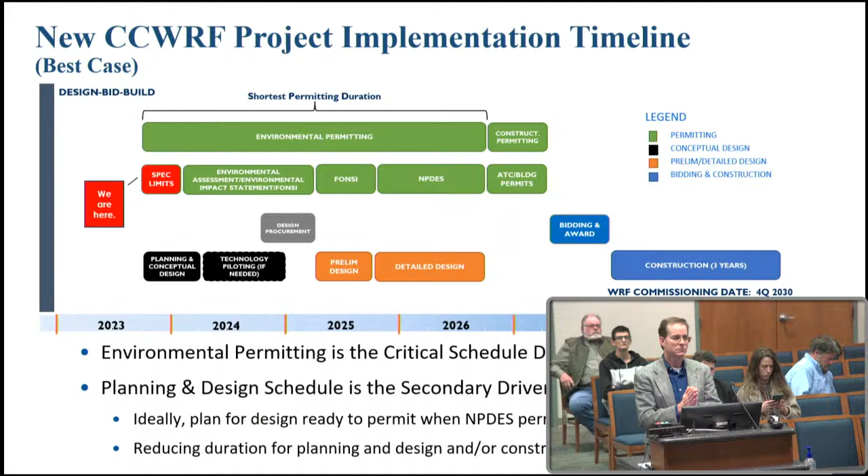Okay? Yes? I have a question while we're looking at this construction timeline. Site B is currently under contract—I believe that contract was going to go through 2032, 2033, just shy of 10 years. So how can we begin construction on that, on Site B?

No, he's just showing you a typical timeline. That doesn't mean that you will or won't do it. That's just a typical timeline for how you could actually build a project. Obviously, the board, if so inclined, would have to make a decision that you would approach that property owner about a change in the lease. That would be a board decision. We're just showing you a timeline—if you started it, this is how long a normal process takes.

I mean, if I had a commercial business on that property with a 10-year agreement, I would be extremely concerned if I was looking at this presentation tonight and it shows that the county would like to begin construction in 2027 in violation of our current agreement. Again, this is just showing the board what it would take if you actually started the process without any kind of constraints. It's not inferring that you will or will not do that. It's just giving you information about how the process works, how long it would take.

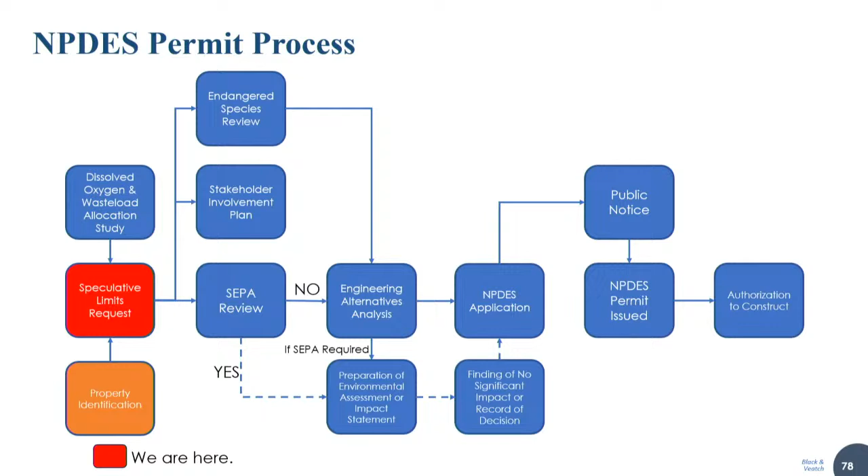So with that, I'll turn it back over to Hung. Thank you, John. So the master plan, Brown and Caldwell, when they put the master plan projects together—since then, time's passed. We're a year and a half since that point. Things happen, and the one thing they look at is what is needed to keep the system going: plants, pipes, pumps, those things. There are other capital projects that are not included on the list that Brown and Caldwell initially developed that we think need some consideration, or at least some direction from the board, and we want to bring to your attention.

The first of those is the Operations Center expansion to house all Union County water staff. We're located in two places. There's about 100 staff out at the Operations Center, basically doing the field work, taking care of the hydrants, maintaining the equipment, out at the plants, basically out in the field doing stuff. We have about 75 employees in this building, all of floor 4, half of floor 5, and all of floor 6, doing utility work—everything from engineering to new development to customer service to taking new applications. It would be beneficial to the utility to be located in one place, and we've identified that as the Operations Center.

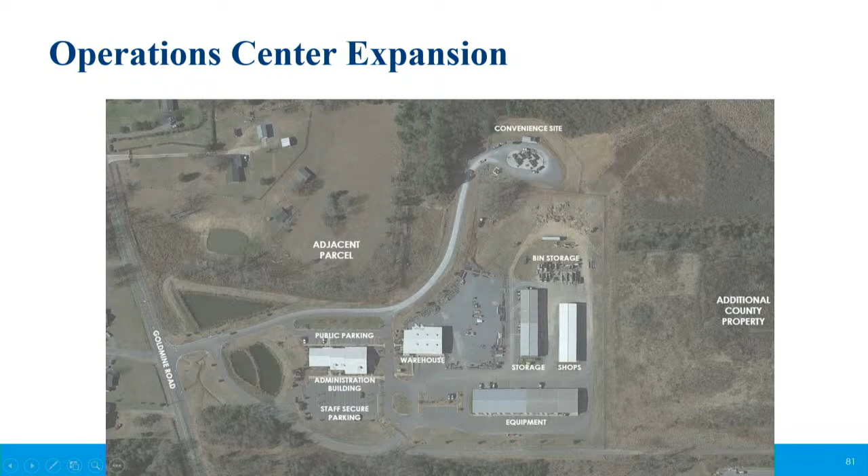There's enough space out here that if we built it properly, we could move all of us out of this building and co-locate us in one place. This location wouldn't be just the Operations Center, it'd be Union County Water's global headquarters. This is where we would be stationed out of.

I was hoping to get a laugh with that, but no, you guys are not laughing right now.

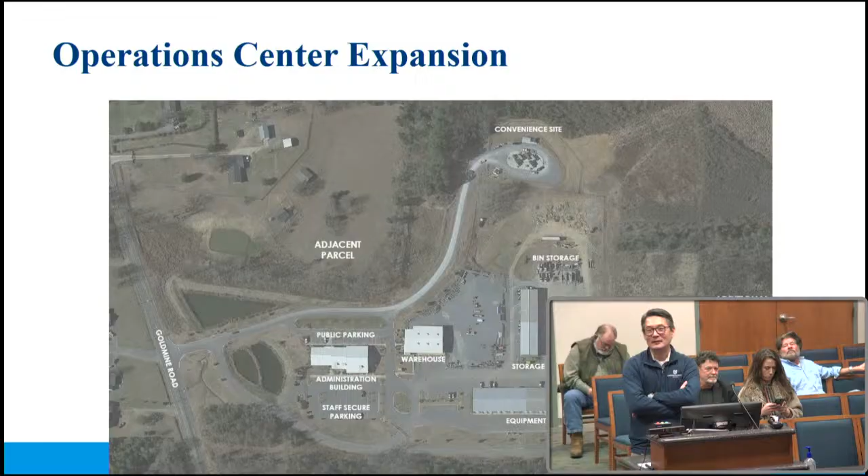But that's all right. I want to point out that the reason this is here is because it's part of a bigger picture. We have space needs that are driving what we do in the government facility. Our judicial center, they are needing additional space. First off, we have 18 new public defenders that were part of the budget.

We didn't ask for that, it came in the budget. So we'll have to account for those individuals. The judges, we're potentially going to add a new judge. We need new courtroom space. All of that equals space that we don't have in the judicial center.

The easiest way to accommodate that is to put those facilities here in this building, which means we then have to find space for the individuals that we relocate out of this building. So you're seeing this because the easiest way to make that happen is to expand the operations center, move all of the Union County Water folks out of this building, which frees up space in this building to accommodate for judicial. So it's a larger discussion. They're showing you this because it fits into that discussion.

The second thing I want to make you aware of is in the previous master plan, it was intended that Crooked Creek would be decommissioned as a wastewater treatment plant. Frankly, it's old. It's hard to find parts for the equipment, we've often had to custom make the parts to keep this facility running. That's how old it is.

It's also landlocked. There are residential neighborhoods on two sides, a commercial structure on the other side, and there's no way to expand this facility. Even if you could expand the footprint or treatment capacity, it is highly unlikely the state would allow us to amend the discharge permits because of the location of the stream and the discharge.

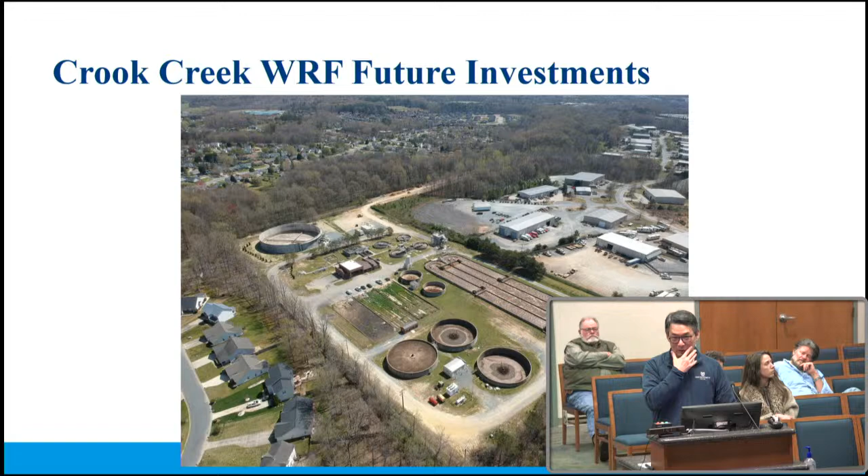I'm going to use something picturesque here. If you've ever been to a North Carolina waterfall, you know how pretty they are. But you also know that when the water comes over the edge, there's a lot of turbulence, a lot of mist, a lot of spray. Now imagine 1 million gallons of wastewater doing exactly the same thing. There is mist, there is spray, there is gas.

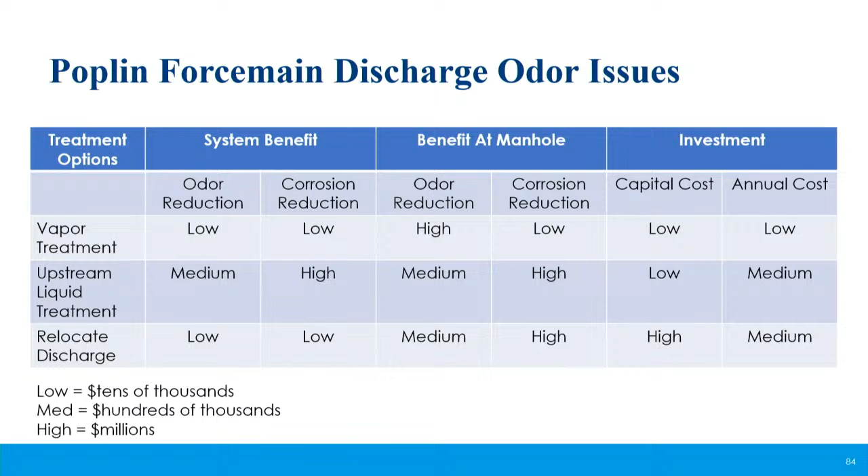So they looked at 3 things, and I'm going to take you to the column on the left: treatment options. They said you can really do 3 things. You can deal with it at the manhole and treat the vapor, the gas that's emanating from the force main. Or you can do some sort of treatment upstream from the discharge.

We'd follow it all the way back to the force main, probably even further back to one of the pump stations. You could treat it upstream so that by the time it gets to the bottom of the force main, a chemical reaction has taken place to dampen or reduce the odor.

The third thing you can do is just move it. Move the force main - it's located under the road. You can extend it, dig it, basically put a new force main in and route it somewhere else where there aren't people. That way you're not dealing with the odor directly. The odor's still going to be there, but there won't be people there to smell it. So those are really your three options.

They looked at two things for the system - Black and Veatch did the work for us. They said, from a system standpoint, the vapor treatment doesn't help the system at all. It just deals with the odor in a localized place, whether it's one manhole, two, or three - it's really just benefiting right there. There's no system benefit.

One of the things we also look at is there's some corrosion effects as well. Treating the vapor doesn't help you manage the corrosion that comes from all the gases working its way through. The liquid upstream treatment has medium odor reduction benefit to the system as a whole, and it also benefits you on the corrosion side, so that's medium and high.

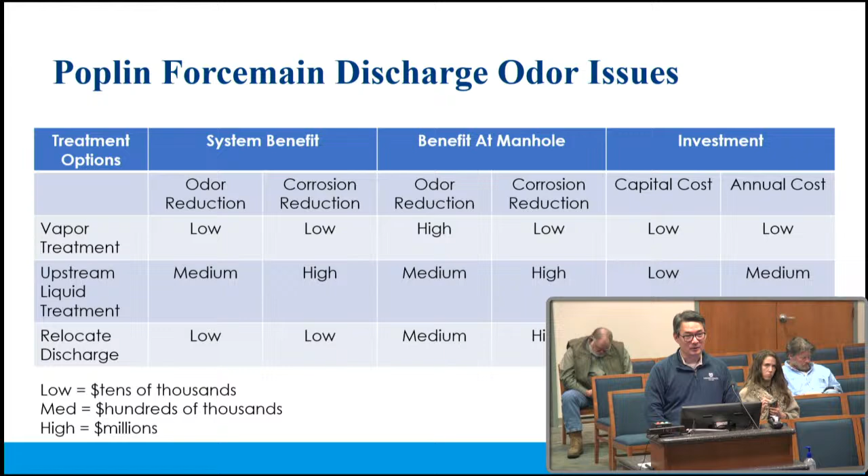So this has been very helpful because we have gotten a lot of complaints and a lot of public comments.

The consultant part, as far as getting information back, is complete — well, they are finalizing their report. We haven't gotten the final report yet; they gave us a draft. We gave them a ton of feedback saying you need to give us more definition, more detail on some of these options, and we had some questions for them. So they've gone back to do exactly that, provide more detail, and they'll deliver us a final report sometime in January, I think.

And then staff will take that and also generate some of these more specific cost estimates for these alternatives. So in preparation for our January discussion, when you bring this back, I just recall there being a lot of question about whether this was an issue that was a result of the developer, or the developer not following the advice that was given, and now we have this issue.

And because it's on our discussion tonight, are we saying that we've inherited this problem, where we're looking at our capital and trying to figure out if we're going to pay for this? We don't have to have that discussion tonight, but I remember a lot of details when those complaints came in, and advice from staff not being followed. Yes — so I'm concerned about Union County taxpayers having to pay for this mistake.

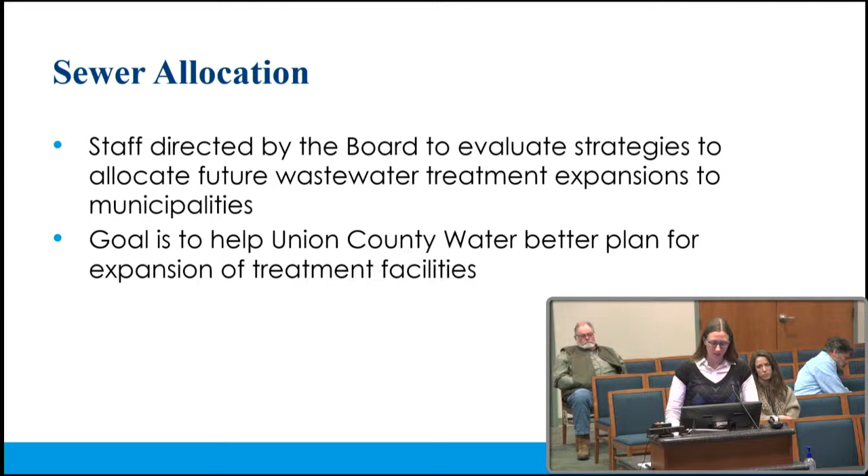So here we are. We've been working closely with the manager's office, and really the intent is to help plan for these facilities, the timing in the future, and how we'll be funded, to make sure we're financially prepared. So I'll give a quick overview of how we're considering this. We'll start with the amount of new treatment capacity. In this case, it's 1.5 million gallons per day with the 12 Mile expansion, but it could be applied to any future wastewater treatment plant expansion.

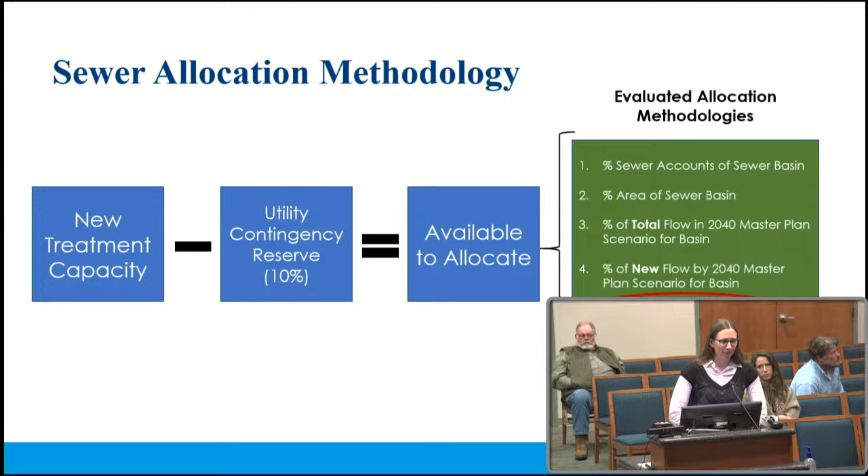We would deduct from that a utility contingency reserve of 10%, just to make sure we're not over-allocating a facility, that we're accounting for inflow and infiltration and not maxing out any facilities. So there would be some remainder, that 90% available to allocate to municipalities and to the county as well. We looked at several different options, and I'll focus on the recommended methodology, which looks at the development potential under undeveloped and underdeveloped areas.

So like I mentioned, we looked at several different options and really focused on this one. The main differentiator and why it stands out is that it looks at the recent history in terms of development in different areas, and also projections. So it's a balance of both rather than just one or the other, and it considers the development potential of land.

This was, we mentioned, using CRTPO data. This was heavily involving the planning department with the county, so really they did all of the math here. And if I misspeak, it's because I don't usually talk about these data sets, but hopefully we can get you more information if you have any very detailed questions that I cannot answer. So we worked heavily with planning to come up with this.

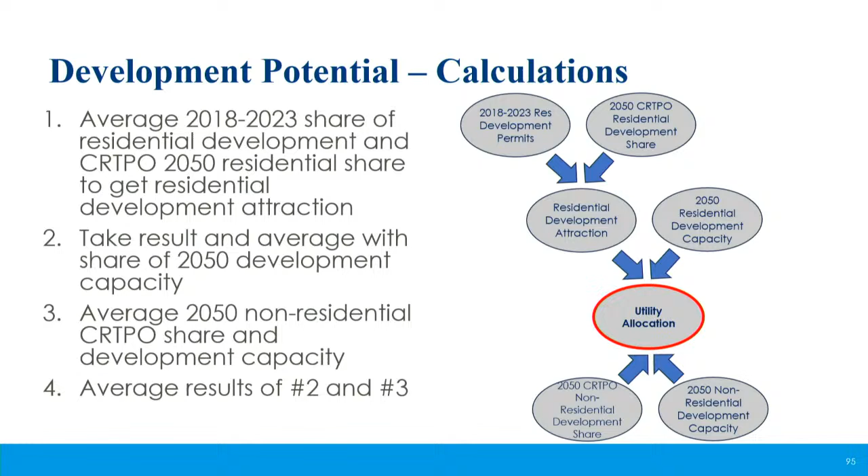And then on the non-residential side, doing something similar. For residential, we're talking about dwellings; on the non-residential side, we're looking at jobs. So again, averaging the development share of jobs that would go to that particular area with the capacity. Then when you average it all together, you get the utility's allocation.

Just as a note, it was agreed upon that all the municipalities would get a minimum of 1%, so that's the 13,500 allocation, just in case they had less, or for example, like with Lake Park, mostly built out, but just in case they have enough to do a small project or one small permit.

We mentioned there'll be an update to the CRTPO data in the next several months, and we would ideally refresh this with that revised data set. So these numbers would shift slightly, but we would be using the most recent data.

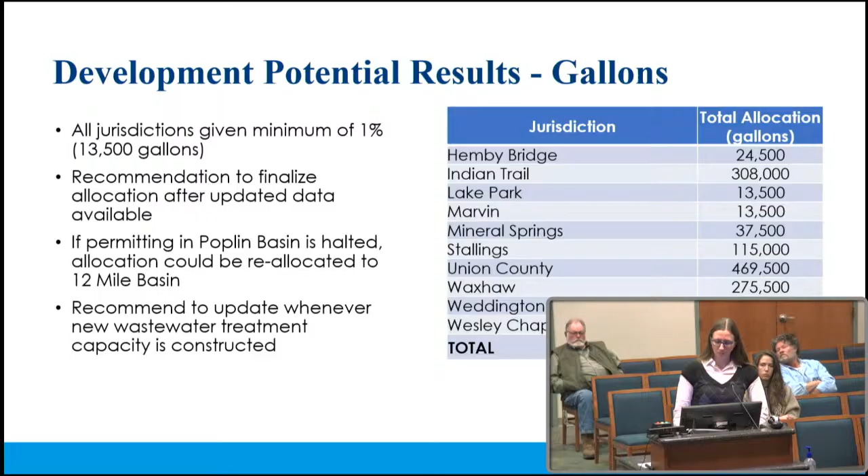What we have here is, first off, methodology. We used residential development potential and job development potential to come up with the percentages, which then yields whatever that gallon might be based on the data today, as well as what may come out in mid 2024.

Ultimately, I think that Jason and legal staff would want to talk to you in a closed session about some of the legal issues with this. We certainly don't want to get into that in open session, but as far as methodology is concerned, we think this is the cleanest and best path, because you're taking into consideration both residential and job creation in the methodology.

What we would ask the board tonight, obviously isn't something for you to approve. It's really to give us the go-ahead to say you're okay with the methodology, that you don't have any concerns with it, understanding that the legal department will want to sit down and talk to you more about some of the risks associated with it.

But we're at the point where we can move forward with bidding on 12 Mile Creek, and we're on hold until the board gives us some direction. The longer we continue to wait, the more the cost will go up on that project. We would ask that the board consider giving us authorization to go out to bid for the 12 Mile Creek plant. The contract would then have to come back to the board, and you'd have to approve that contract. But that would give us the ability to move forward while we're finalizing the actual policy and having it adopted by the board. So as a matter of at least some decision point, I'd ask the board to consider giving us the ability to go out for bid on that project.

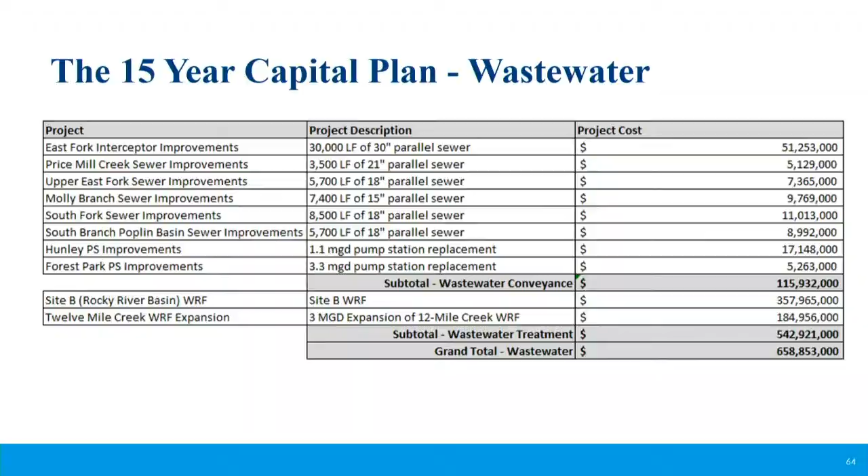You do see that the East Fork Interceptor improvements are shown at the top of that, and that is recommended for the board to consider. Obviously, and Commissioner Helms did bring this up, if the strategy is that we're no longer going to permit in that area, then you can choose not to do that project. You say we're not going to have a parallel sewer line, we're not going to increase the ability for that East Fork to handle that flow. That's certainly a strategy the board can take. But this is looking at it from a system perspective - obviously that's one the board would have to consider.

And then obviously you have the capacity projects. Again, there's no requirement for the board to expand capacity, but if you choose to expand capacity, we have to build that into the capital plan. We're showing you there's a potential expansion of 12 Mile Creek in the out years of this 15-year plan, going from 9 million gallons to 12 million gallons, and potential for Site B. There's a possibility that if the board chooses to move forward with Site B, you may not need the expansion at the 12 Mile. That's not known at this time - a lot depends on how long it actually takes to get an expansion for Site B.

Are we talking about that being in 15 years? Are we talking about that being in less? So it's really about what is the timing and how that plays into the expansion. But in this 15-year window of an estimated CIP, we showed you that just so you would be aware of it as a potential cost. Any questions about the wastewater side of that?